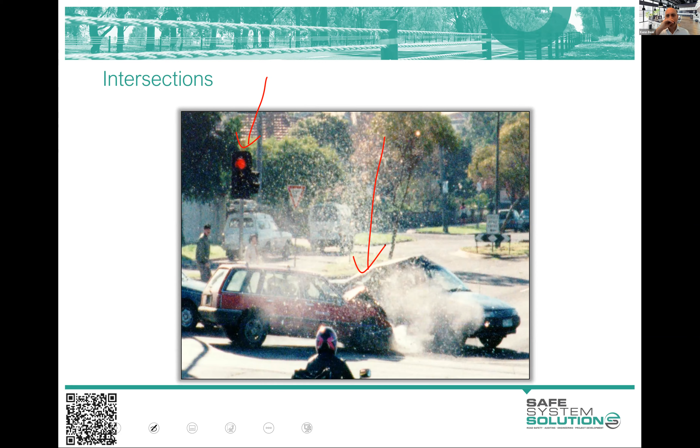Monash University Accident Research Centre came up with some very high-level principles for intersection design for safe system alignment. I'm not going to spend long on this, but I think they're worth going through. Don't forget to count your wombats.

Interestingly, the first few things they've got there are fewer vehicles, fewer intersections. That's interesting, isn't it? So they're starting out with a couple of principles which aren't really what you might have originally thought. Now, if you remember back at the end of last session, we talked about risk under a safe system assessment.

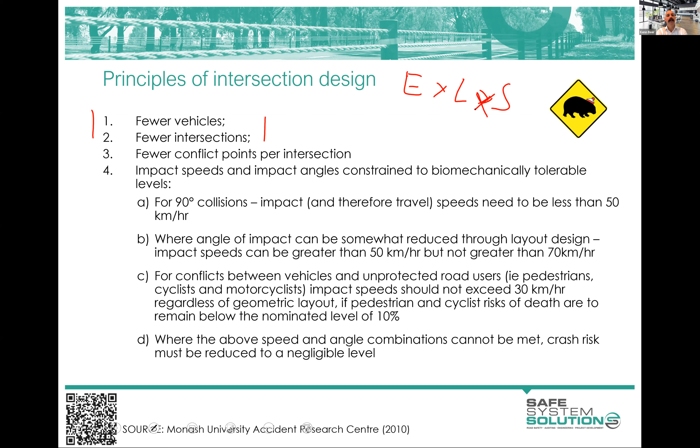Being exposure times likelihood times severity. Okay, that's a multiplication symbol. Exposure, likelihood, and severity. Fewer vehicles and fewer intersections are trying to address the exposure to crashes.

So that's interesting. Fewer conflict points per intersection. That's an interesting one. In a safe system assessment, we had that as a likelihood factor. If you eliminate the conflict points at the intersection, then it would be exposure. If you just reduce them, we call it a likelihood, because it's less likely that an individual going through there will crash.

And then we get into a whole lot of elements associated with the severity. You can see them talking about impact angles constrained to biomechanically tolerable levels. And that's what we talked about, the amount of force that us humans can take before we break. And for the 90-degree collisions, we're talking about that 50 kilometer per hour threshold.

And if you can get a bit more angle on that crash, it could go up from that. What we mean by that, I'll just draw over some of the text here.

So if you think back to your year 11 or year 12 physics, you did vectors maybe. What we're doing is when we're crashing at those sorts of angles, we're pushing the energy into the environment. We sort of bounce off a bit as well, right? You bounce off, and so the energy is not directed into that other vehicle.

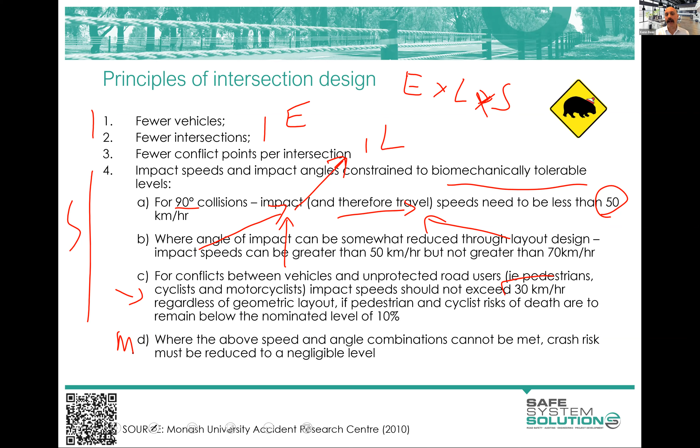So down the bottom of the whole thing is where these angles and speeds cannot be met, we need to reduce crash risk to negligible levels in one way or another. I'll get back to a bit on that. But anyway, that's sort of high level principle stuff.

You are doing this from a broad brush perspective based on this information that you've got there, based on that nice colorful chart that we gave you last module, and some judgment on how severe crashes could be. And if you're looking at a design of a new intersection, something like this, maybe you could draw some lines and get some precise angles, but you don't need to be that precise. You can certainly be a little more

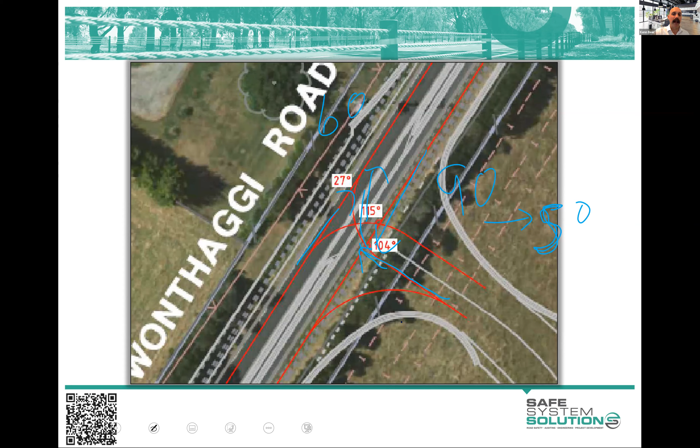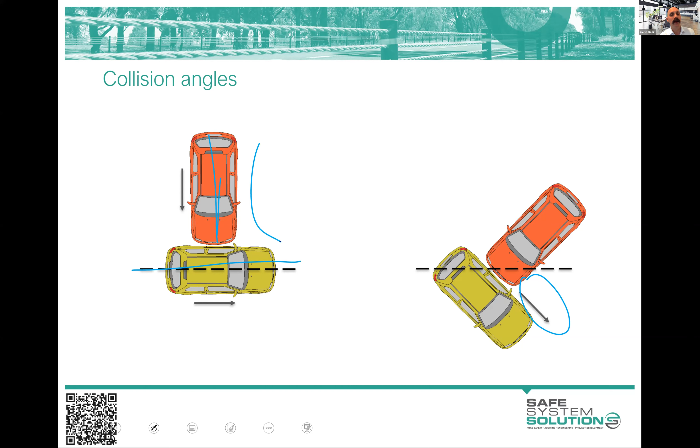Collision angle we've talked about, but also this interesting one of secondary crashes. So when vehicles strike each other, it's not often that it's that directly square. There's all sorts of stuff that goes on in these crashes. But the Centre for Automotive Safety Research did a big study of lots of intersection crashes that had secondary crashes occur that cause death and serious injury.

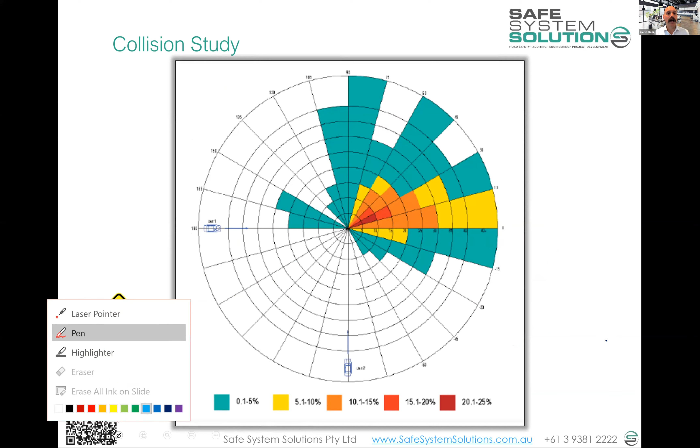So the initial incident occurred at the intersection, and so they've reorientated all of these onto the same axis. So you've got vehicle there, vehicle there. They come in, they have an initial strike, but then there's a secondary crash, which is the one that has, in their opinion, caused the death or serious injury. And you can see that it's obviously in that general area, the bulk of them, but there are some spin-off crashes.

There are some ones that go slightly into different areas there, so those are interesting ones. That might have been clipping the back of the vehicle and going off into that direction. Maybe I think there had to be an actual collision rather than just avoiding. But maybe, I don't know whether that research needed to be done. It's kind of obvious, but anyway, it's there.

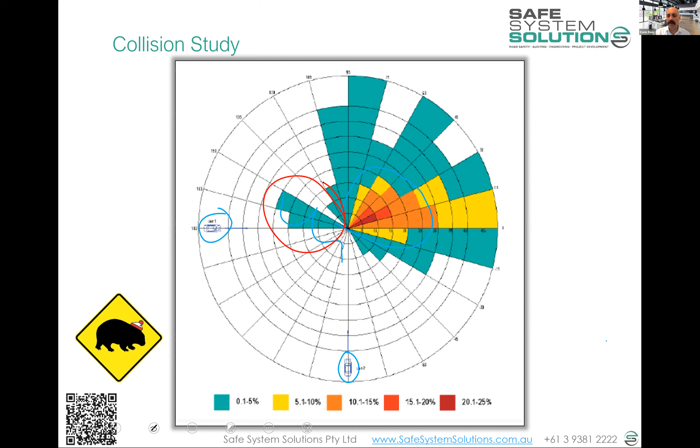But do remember these and keep these in mind.

50 kilometers per hour for a 90-degree crash for passenger vehicles, 60-ish kilometers an hour for more angled crashes, 70 for a head-on, and rear end. 80 is put there as not feasible, but it is feasible to run an intersection at 80 kilometers per hour if you have some sort of ability to get vehicles up to speed.

So if you've got a vehicle going and another vehicle that's managed to get up to speed, and those two crash, the delta V is what we're interested in - the change in velocity. That's what's being pushed into the occupants of the vehicle. So that first crash can happen at very high speeds as long as the vehicle's delta V, the difference or change in speed, is not above these levels. Obviously in that scenario you very much need to think about secondary crashes and where vehicles are going to go. But from that first perspective, it's pretty good.

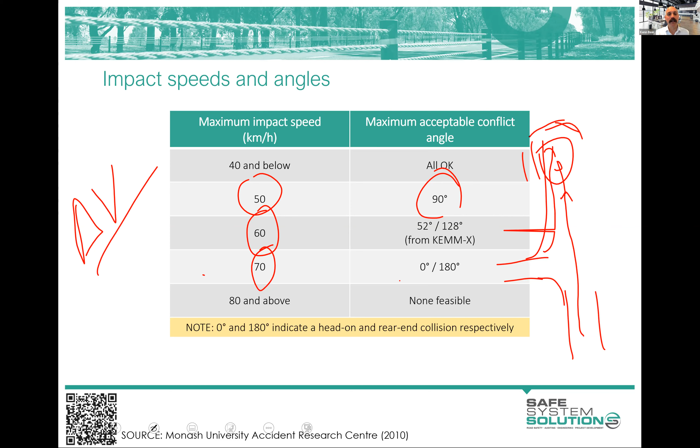All right, Max, anything I need to deal with before I jump into explaining an intersection exercise? All good, let's hop into the exercise.

Thanks, Ken. We are going to give people a few minutes on this one once I explain their task - a good few minutes, probably 5 or so at least. So let's jump into it.

Here we go. You've got an intersection. You probably don't know this intersection, but anyway, it's there. It's got a major arterial road on it here.

That's an arterial highway with a 70 kilometer per hour speed limit. It carries about 21,000 vehicles a day, 9% heavy vehicles. This is a bus stop over here, so it's a bus route.

This is like a drainage culvert underpass - it's not really an underpass, it's a drainage under-structure thing. Some of you will probably be angry at me for my lack of terminology around drainage structures, but it's a big culvert thing. This is a shared path.

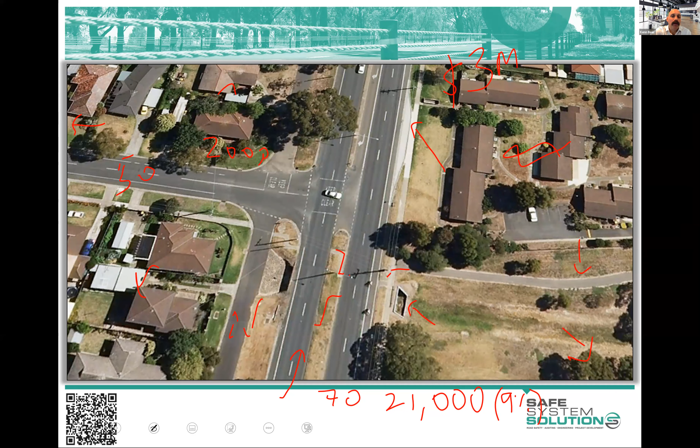So they've got to be coming from this way, be able to turn in. They've got to be able to turn out left and right, and they've got to be able to turn in from this direction. Service roads can be reconfigured and changed. There are some access points to the service roads in both directions as well, if you're particularly interested in that.

So yeah, can't close the intersection. I know you wanted to, because that was Monash University Accident Research Centre's first thing. Oh no, that was less vehicles was first thing. Second thing was less intersections.

The third constraint I'm going to put on you is you are operating in the current organizational and political environment in which you currently operate. So if you work for a state road controlling authority, you've got to imagine it in your organization, or if you're in local government, imagine you're in your local government and what the appetite is. If you're a consultant, maybe think about some of your clients you work for.

So if you're proposing something radical, something different to what is done, have a bit of a think about a strategy for moving that through the system, getting people's approval on that.

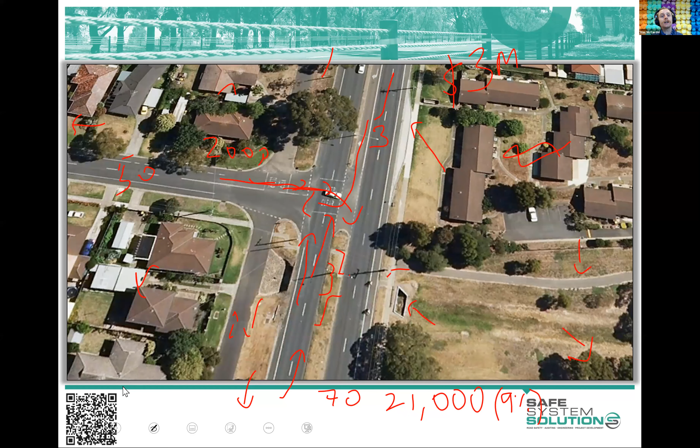The first cost estimation for our estimation tool for you, Ken. How much would it be to signalise this whole intersection? To signalise the intersection, $1.5 million. Okay, under budget. It's set up quite well to be signalised.

What about a roundabout here, Ken? How much would that cost? Yeah, a roundabout to meet the Austroads Guide to Road Design Part 4B, roundabouts. To meet that, because this is a B double route, to meet the size requirements there, it's going to cost $7.3 million.

Okay, so that's certainly out of budget. But what about a pedestrian overpass? Nice fly over the arterial there, Ken. Yeah, pedestrian overpass to meet DDA compliance requirements. It's going to have some ramps, then it's going to go over, and it's going to have this funky bit down here or something like that. We can do that. Well, it's 3.01, but I'm going to give you a good deal, and you can have it for $2.95 million.

Very good. Speed limit reduction. You could do a good deal for that, couldn't you, Ken? Yeah, we can do a good deal on a speed limit reduction. Some of you might be going, oh well, that'd be like a couple of thousand dollars. It's actually going to cost you $50,000. I know you're thinking you can just whack up the signs, but we need to do a bit of work behind the scenes. There's a process, community consultation, a period of that, then changing some of the electronic systems behind the scenes and inputting it into the GIS speed zoning system. And so we get some consultants involved to do some reviews. So $50,000 all up to change the speed limit.

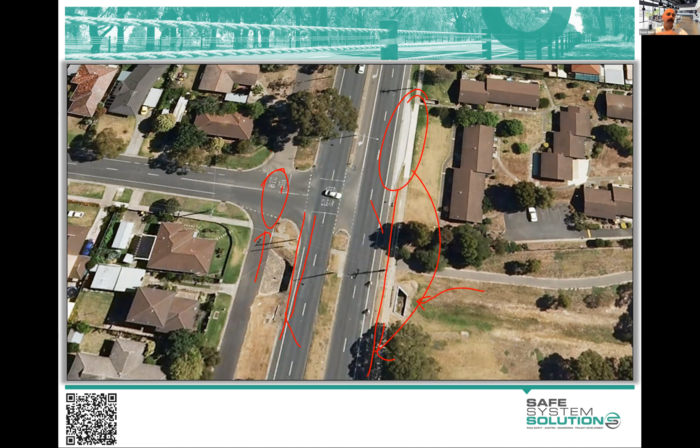A lot of you raised the signals idea. I'm going to put this little box in a lot of upcoming slides because I want you to get good clarity around what alterations in infrastructure change exposure, likelihood, or severity. A little window into how you do an assessment: you need to score exposure, likelihood, and severity for different crash types, and be able to justify each one—be very clear on what fits into what category. Signals are a likelihood-reducing piece of infrastructure.

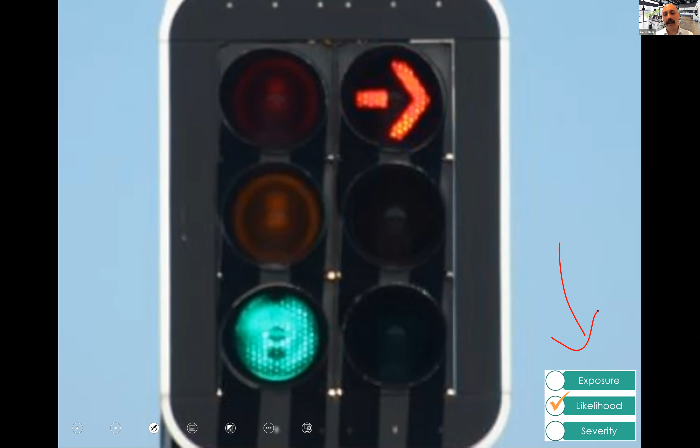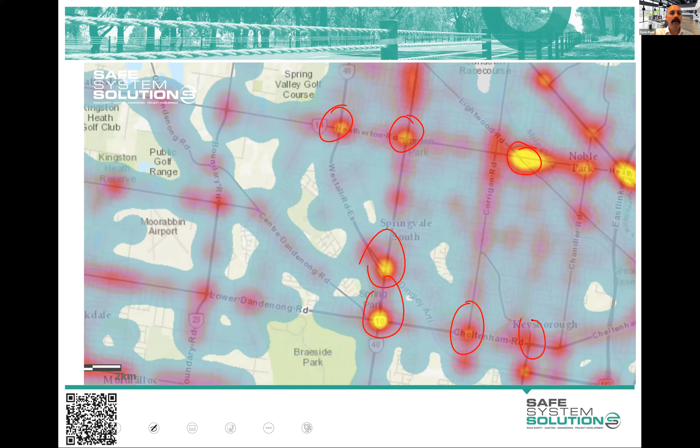But it's interesting to look at traffic signals—you can do this around pretty much any major city in Australia and New Zealand and find the same thing. What we've done here is grab a heat map: we GIS'd death and serious injury over a 10-year period and set the hotspot analysis going. The more intense the hotspot, the more death and serious injury. This is an outer suburban Melbourne area, around Springvale, but you could do it for Brisbane, Sydney, Newcastle, Auckland—the outer areas. What we're seeing are hotspots of death and serious injury, and each one I'm circling now is a large signalised intersection.

Doesn't that make you scratch your head a little bit? Really? Signals. If you plot your state or city's top 100 intersections for death and serious injury, the bulk of them are going to be large signalised intersections—the significant bulk of them. The reason we always find that is people get to the point of, we've signalised it, put in fully controlled right turns, red light cameras and speed cameras, and they just say, well, it's the road users, they've got to start following the rules. And the interesting thing is we just keep building these and thinking we're going to get a different result.

The interesting one is in a lot of these outer growth areas, what we're finding is that there was a roundabout there, and the volume of traffic increased and it became saturated, so they decide to duplicate the road or whatever they're doing—rip the roundabout out, put traffic signals in, because they can get a bit more capacity out of that.

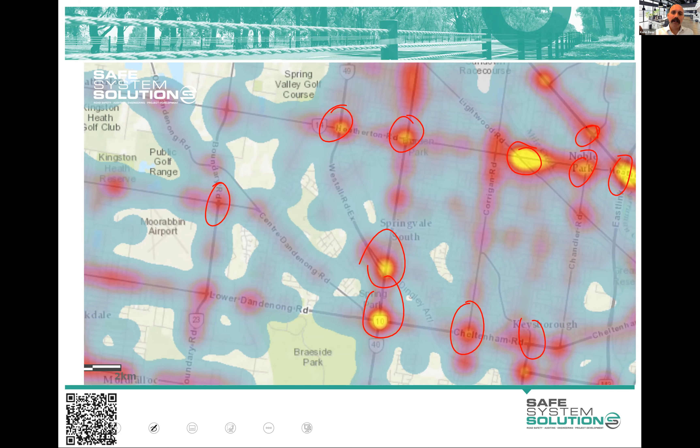Actually, Max, in a second I'm going to pick something out of my archives from my time at the Road Safety Department. But I'll explain roundabouts first—remind me if I forget. Yeah, no problem. It was nice to see a few people straight off the bat questioning, could we get a roundabout in?

Roundabouts, in a safe system assessment, we give them the severity reduction. And the reason for that is the lower speeds people go through them, and the better crash angles. So they're two immediate benefits.

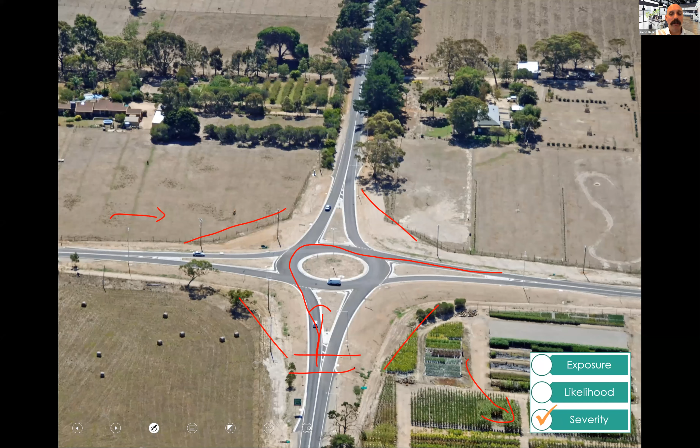Mind you, I do like the idea of metering roundabouts when you're in these situations, where maybe you could put a set of traffic signals here as a lovely pedestrian crossing, with a nice crossing path there. But these could also trigger when the queues of vehicles on this road gets down, and you could trigger that to a red, link that to that, and then some of them could distribute out, and then you could keep going again. So win-win, better crossing for pedestrians and cyclists, and some metering there as well.

Just going to say those art classes are coming along very well, Ken. That's a beautiful sketch you've got there. Thank you, well, I'm going to use some other colours.

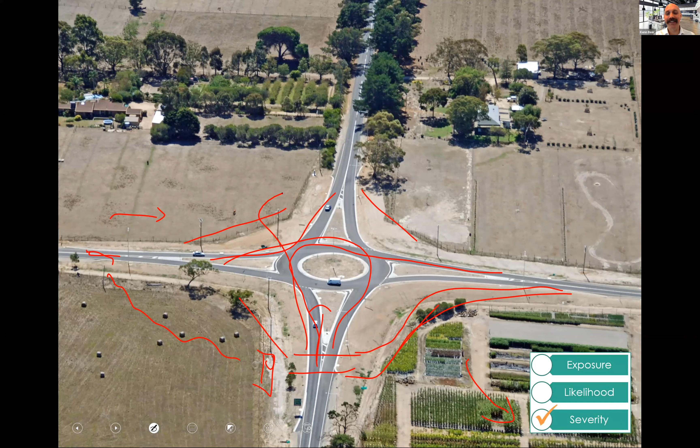But why are we getting such good safety benefits out of these? And we do get really great safety benefits, as well as some good traffic flow benefits also. The big reason on this is not the deflection, which we often talk about as one of the great reasons, conflict angles and the like.

The reason is that every vehicle approaching this, or more accurately, no vehicle approaching this believes they have ultimate priority. Each one is slowing down to look around because they may or may not be able to enter that intersection safely. And so what we immediately get is this enhanced awareness and looking around of vehicles and some slowing down. This is kind of the UK equivalent of the American four-way stop.

And I'm occasionally seeing four-way stops popping up in different parts of Australia and New Zealand, and really enjoying that. I think there's such merit to that, because we get most of our problems when a vehicle is travelling at speed and just continues travelling at speed. And if you can break up that at conflict points, we're in a big win.

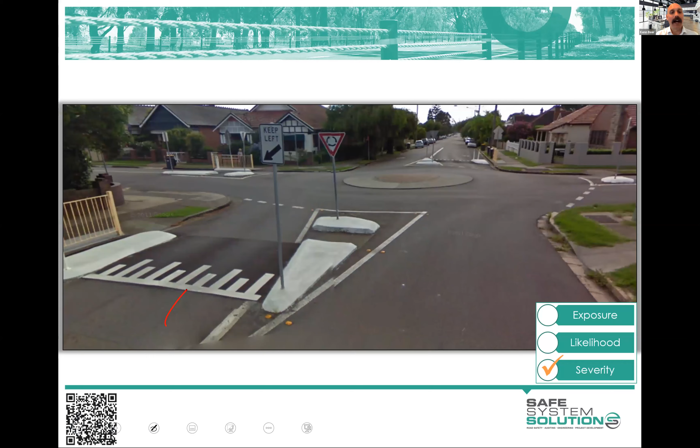Mini roundabouts, if you're worried about some of the approach speeds and things, of course, you can do raised bits to slow vehicles down on the approach to roundabouts, which is working quite well. And I've got lots of different guidance available on this stuff.

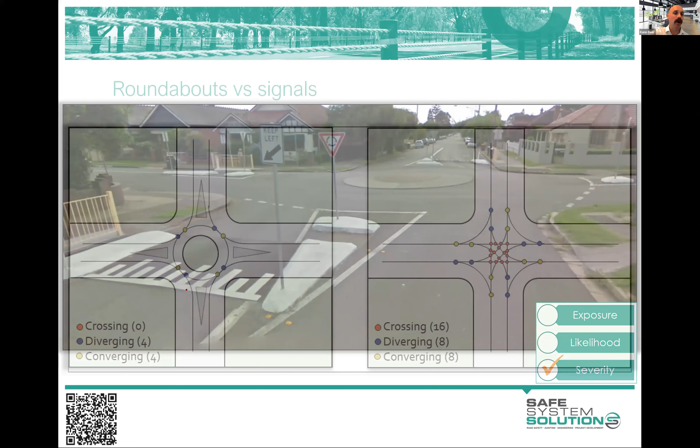But roundabouts have other advantages too. We do see less conflict points. The conflict point being simply the way you can crash compared to a signalised intersection or a give way/stop controlled intersection. They're just all the crash ways between passenger vehicles.

Okay, now pedestrians and cyclists becomes an interesting one. So what we see is the pedestrians and cyclists - pedestrians do not like roundabouts, and I'm sure you've faced the same. You don't like having to cross at these roundabouts. The severity of crashes is often lower, but we certainly see people avoiding crashes, and likelihood of crashes is up a bit. And it's certainly a major impediment to a lot of people walking as well, old people, young people, or parents letting young people walk.

So some issues around vulnerable road users. Max will talk a bit more about cyclists, and I'll talk a bit more about pedestrians and roundabouts in the next session.

But from a severity perspective, everything's still brought down. The challenge at signalised intersections is when crashes happen, it's often somebody running the red light. In fact, that's exactly what's happening. Or pedestrians walking out. It's like the speed is high, thus the severity is high. And we've got all of these extra conflict points as well.

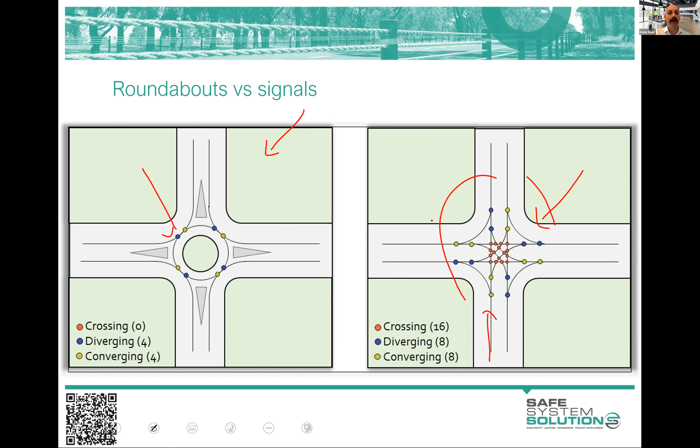The angle is better at a roundabout compared to some of the crashes that can happen at a signalised intersection.

As a vehicle approaches, I've talked about before, they don't have ultimate priority. Also, if there's a lump of infrastructure in the middle of the road that they've got to navigate around, they wake up. People are driving in all sorts of states of consciousness. And we don't like that, but that's the reality of it.

Sometimes they've worked a double shift. Sometimes they're a bit drug affected. Sometimes they're thinking about the fight they've had with their partner. And to have infrastructure pull them back to reality is just an amazing thing to be able to do.

And a roundabout does that. In fact, any sort of deflection on the road environment does that. So that's horizontal deflection around a roundabout, or vertical deflection over a hump or the approach to the hump. They will come back to reality, navigate their feature, and then go back into whatever world they're in.

We're always talking about alert and compliant road users, but unfortunately they're not in that camp all the time. So if we can get this at areas of high risk, we're in a great position. So that's my little slide to remind of that.

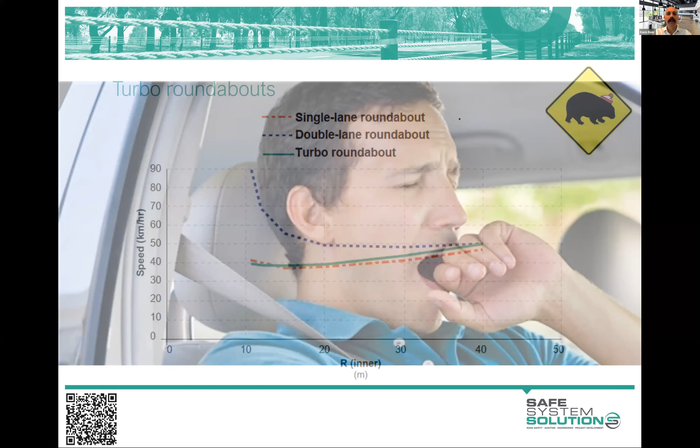Before I jump into some different roundabouts and discussion, let me stop sharing for a second, Max. I want to see if I can find something briefly. I'll give the history of it as I'm looking, if that's all right.

So it's in the road safety department at Vic Roads quite a while back. There was this massive congestion easing government investment. It was like the biggest congestion easing program anybody had ever seen. It was called, I think, Keep Melbourne Moving. Basically it was ripping roundabouts out and replacing them with traffic signals, because the modeling was showing you get better flow of traffic during peak periods.

So those were all coming into the road safety department. The designs were coming in for road safety review, road safety audit, and we were getting them and looking at them and going through them. What I think the regions were expecting from this was for us to comment on things like the line marking here should be different, or the phasing here is not right, or you need to use slip-base poles in these locations, or use joint use mast arms here, or these sorts of things.

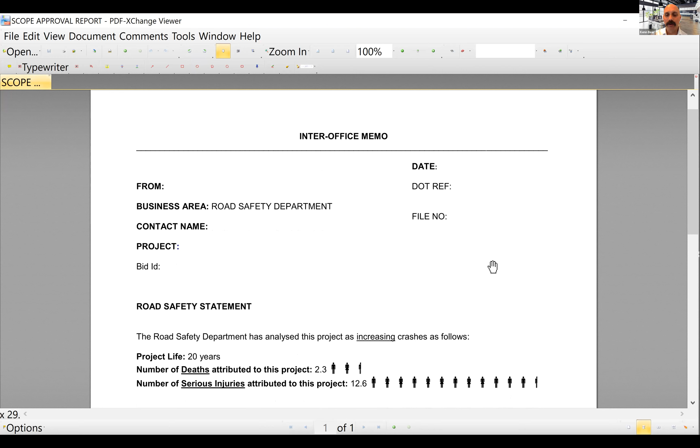But we started developing and sending out this one, and I have found it, so I will share it with you. Here it is. So I hope you can see that. I took a copy of this after I left. So this is the memo shell. So it was, you send it off.

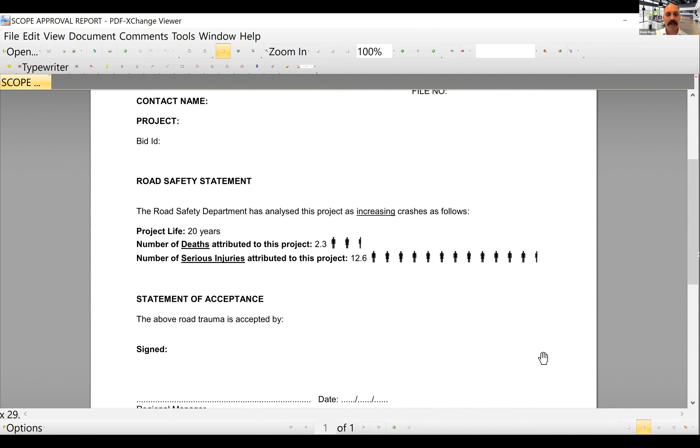Here we go. So the road safety department has analysed this project as increasing crashes as follows. Project life, 20 years. Number of deaths attributed to this project, 2.3. Number of serious injuries attributed to this project, 12.6. Statement of acceptance: the above road trauma is accepted by, and send it off to the regional manager or regional directors these days, for a signature. So that was the covering note on the return of the design.

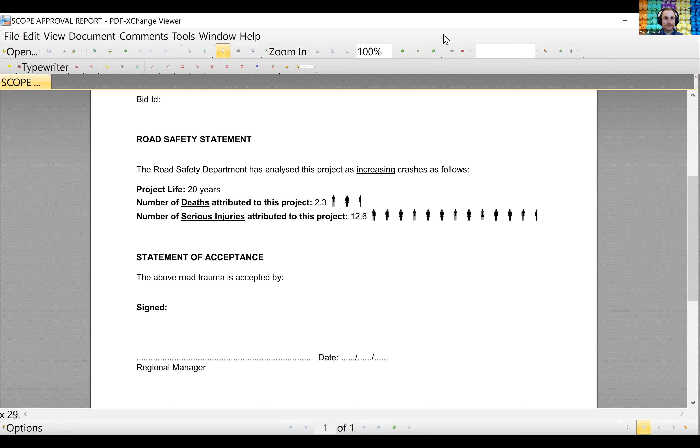Now, that was obviously well received by upper management there, Ken. It certainly was not. We never got one back signed. Myself and a colleague got hauled into the executive director's office, with a lot of commentary around not understanding the obligations of a road authority and the varied balances that need to be made, and the importance of easing congestion and the like. But the reality is that we were just saying this is going to make road safety worse, and somebody needs to stand up and sign off on that. Yes, intentionally causing a bit of a ruckus, but sometimes you need to do that to break up the usual.

Now, the reason I thought of bringing that up is because you don't need to do that these days. I mean, you can if you want, and I can show you how to calculate those numbers pretty easily. But you don't need to do that, because we have a safe system assessment which will quantify that and show the scores, not quite as in your face as sign off on killing and seriously injuring this many people.

Safe system assessments will address that, and I'll show you a little bit later on that it's quite heartening to see that it would be very challenging to rip out a roundabout and replace it with traffic signals without doing some other severity works these days. Although it does still happen occasionally - I do dust off the memo.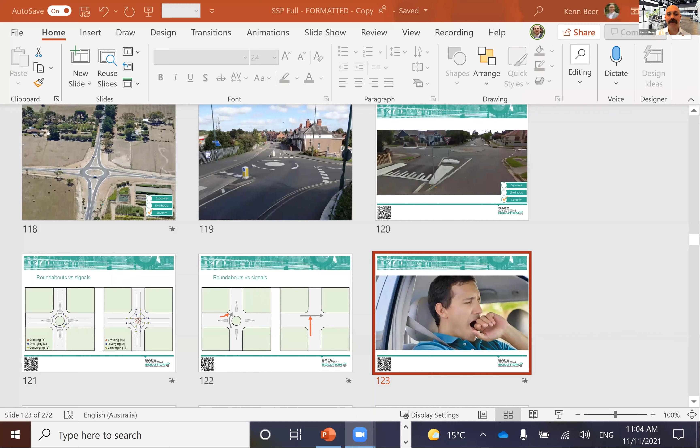Anyway, let me get back into where we were at. Oh, gone back to the same memo, have I? Nothing shared just yet, it's still blank. I disappeared for a second, did I? You did, it was very stressful. Don't get worried, Max, you've got all the content ready to go. I do. We're back, there we go. Good stuff. Okay, well I took a tangent there. Getting the old memo out. Okay.

We were talking about roundabouts. Roundabouts have some challenges around - you can't pump as many vehicles through there at some points in time, although I always question the traffic modelling when they do peak periods only. You're like, well, that doesn't really work, because what about all the other hours of the day where people are sitting at red lights for no reason? If it was a roundabout, they'd be able to go through. So can we do this across the whole day? Yeah, okay, the peak periods aren't going to perform as well, but the other periods are going to perform better. So anyway, it's another debate.

But we know not all roundabouts are the same, and we get better and worse outcomes at different roundabouts. Pretty much all of them are still performing better than most traffic signals in higher speed environments. You can see here an interesting chart of speed and inner radius of roundabout, and we see that smaller radius multi-lane roundabouts don't perform that well. Speed is often a good proxy for crash rates. Single lane roundabouts are better, and turbo roundabouts are performing pretty much the same as single lane roundabouts from that perspective.

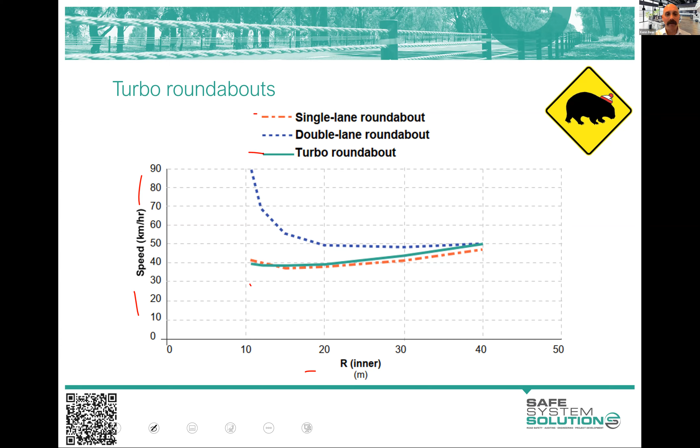Now, a turbo roundabout, just for your interest, is a dual lane roundabout, but you have a raised separator on the approach and throughout the circulating carriageway there. So if you want to go right, you've got to get yourself in that right lane, get into your sheltered right, and then around you go.

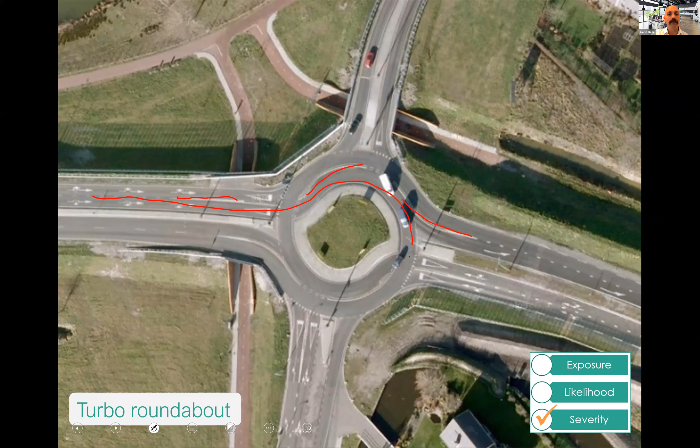Here's another turbo roundabout. I love this aerial image, because have a look at what's going on over here. We've got a truck that's obviously entered the roundabout with a vehicle coming, but look at the angle that's happening. It's beautiful. And we know it's going to be low speed, don't we? So you're seeing a mistake going on right there, but we know that it's not going to result in death or serious injury - just due to speeds and angles.

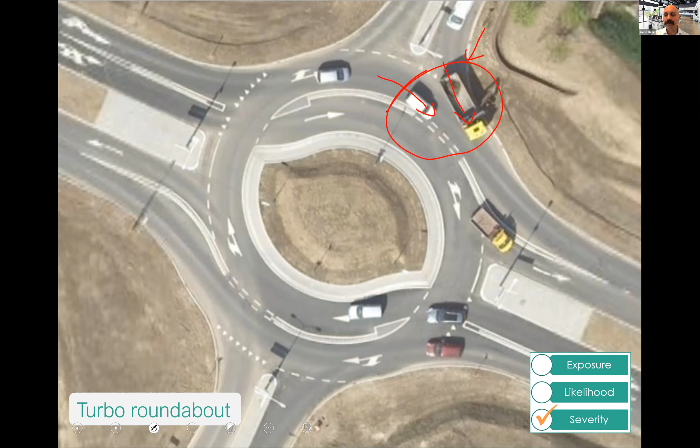And this is an interesting little roundabout. This is a massive roundabout, isn't it? It's a beast, and it's a turbo roundabout, and it's signalized as well - so it's got signals as well as the roundabout structure. It's out of the Netherlands, and I flipped it around because it would be very confusing if you were trying to think about it driving on the right.

But the reason I popped this one in is we had a Dutch engineer who we brought over - we were delving into cyclist roundabouts and the like. But I showed him this one. I said, this is just fascinating, I was amazed by it. Asked a bit about some things around traffic volume and the like. I said, in Australia, that would be a large signalised intersection until maybe at some point it got grade separated, right? But it would be a large signalised intersection at 70, 80 kilometres per hour. This was a few years ago.

And he goes, with raised platforms? I said, probably not. And he's like, but what about all the death and serious injury that would happen? And I'm like, yeah, I know. And he's like, he could not fathom that you would do that to your community. Which just sort of gave me that - we just think about this in a bizarre way, don't we? But they would, rather, acquire the land, spend the money, have this sort of operation than the idea of leaving that residual risk to their community.

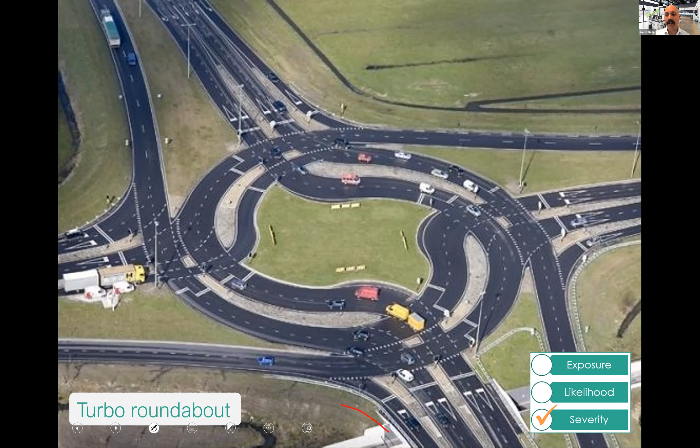It is interesting to see this philosophy playing out with our large signalised intersections. The question becomes, how do you disrupt the driver from that straight, fast run? And what ways can we do that while still acknowledging that on some of these heavy traffic routes, we're going to try to keep capacity up or improve it?

People are coming up with ideas like this one, the cut-through roundabout. The philosophy of it is really good, but people get freaked out by this. I think if they actually built it—and it is an artistic mock-up, it hasn't actually been built—if you were on the ground, it wouldn't be as scary as it looks from up here.

But the idea being that a vehicle coming in here is going to see the roundabout, it's going to slow down, improve their angle, and the road just winds all around.

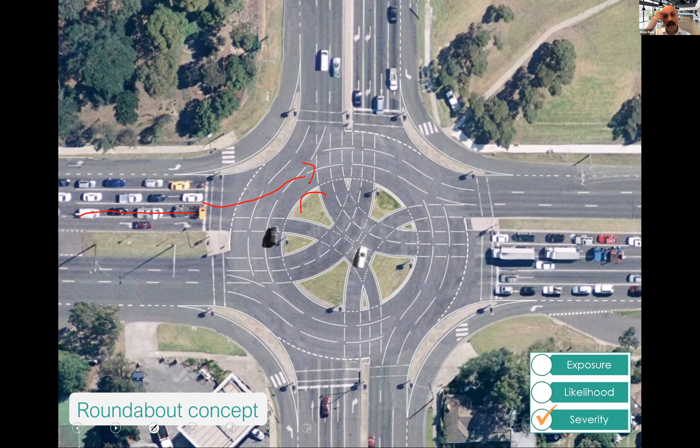As quite a few people were alluding to, can we utilize vertical deflection—raising the intersection, raising parts of it? Back when I started my career, if I'd suggested that on that road, with 21,000 vehicles a day, 9% heavy vehicles, a bus route, I would have been kicked out of the office. I'd have been told to come back tomorrow when I'd thought about what I just said—it would have been ludicrous. It's a highway, it's the arterial road, it's got freight, it's got emergency vehicles. We don't do vertical deflection on these roads.

But thankfully, we've evolved, and now it's very legitimate to look at whether we can provide some sort of raised feature on these high-speed roads. I'm not talking about your local urban speed hump—we can alter the grade to try to cater for different speeds and different vehicle types.

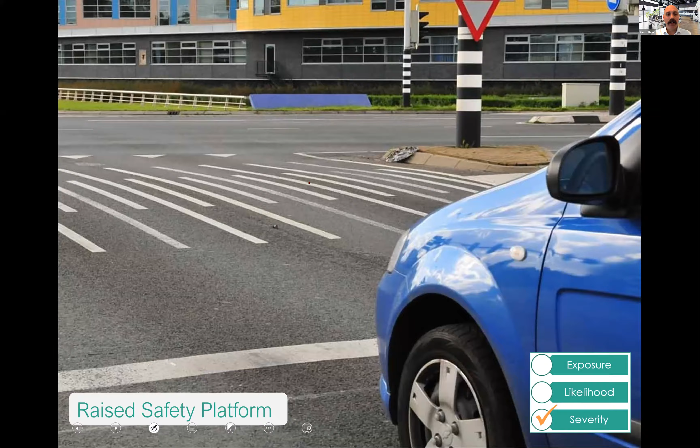So the region, in this case, looked at this and did some analysis—very similar to what you all did in 5 minutes, but it took a lot longer than that. They came up with the conclusion that signalisation is probably the appropriate treatment, given there's signals down the road both ways, and unbalanced flow, so signalisation is probably the go.

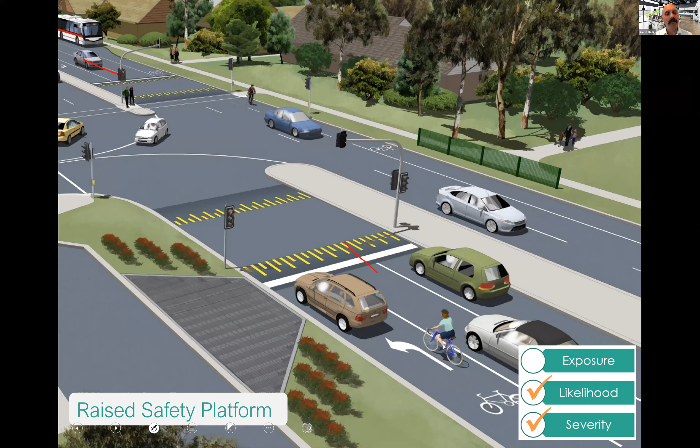To their credit, they asked: are we willing to just accept that there's going to be this residual death and serious injury, or can we do more? And they opted for raised platforms on the approach there—not raising the whole thing, to save some money, but also because it's not required, since what they were particularly interested in is reducing the speed of the bullet vehicle.

This is the one that's going to do the damage—the bullet vehicle. This one turning in, or this one coming out, they're not the bullet vehicle, they're the target vehicle. You don't need to disrupt their speed because it's a T intersection. You want to disrupt the speed of the target—sorry, the bullet vehicle.

Now, the cyclists and pedestrians, we'll put that to the side for the moment and come back to that at a later point. But the idea is a good one.

What sort of speed, when they're thinking about that bullet vehicle, that exiting vehicle, do you think the region was trying to get the speed of that bullet vehicle down to? Prue was in there pretty quickly with 50 kilometers per hour there, Ken.

Yes, well done, Prue. So I was specifically talking about the vehicle-to-vehicle exit, and it's about a right angle there. Remember, 50 or below is what they were aiming at. Now, if you're really focused on the pedestrians, it would be 30 or below, and that would be nice. But this is where they get themselves to a balance, saying going from 70 to 30 on this, with all of that stuff, is a challenge—and there are low pedestrian numbers.

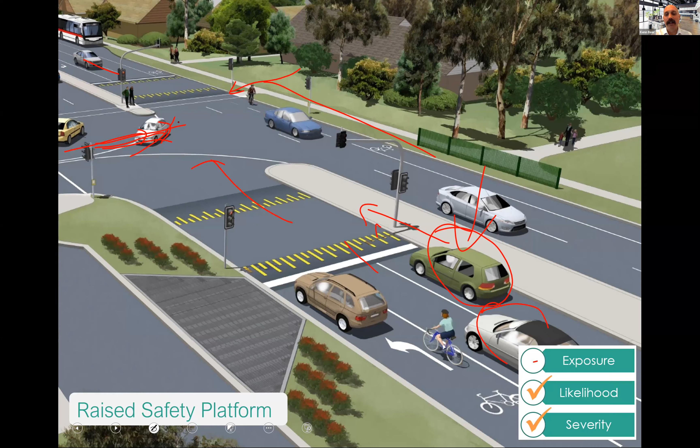We're reducing the likelihood of pedestrian crashes with a whole lot of good features. So, in the balance of things, that's how this one played out. But remember that 50 for passenger vehicle right angle crashes, and there you go, it was built.

Okay, this is not just pie in the sky ideas anymore. This is a while back now, almost 5 years back. You can see there advisory 50s. Now, eventually, the speed limit actually got reduced, but that was never the first intention. The first intention was to do it with advisory speeds.

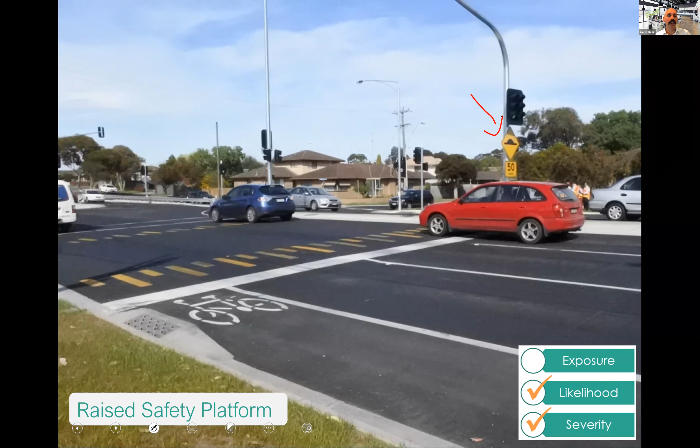And people are far more accepting of advisory speed limit reductions than regulatory speed limit reductions. When you give them the option to slow down because of infrastructure, they don't get too angry. You put a roundabout in, for example, people don't jump up and down about the speed issue. They jump up and down about some different things occasionally. But the idea is that they have to slow down to navigate this, but it's their choice to do it. They're not going to get a speeding ticket if they don't slow down, but they will, and they never complain about that. So this is a similar idea.

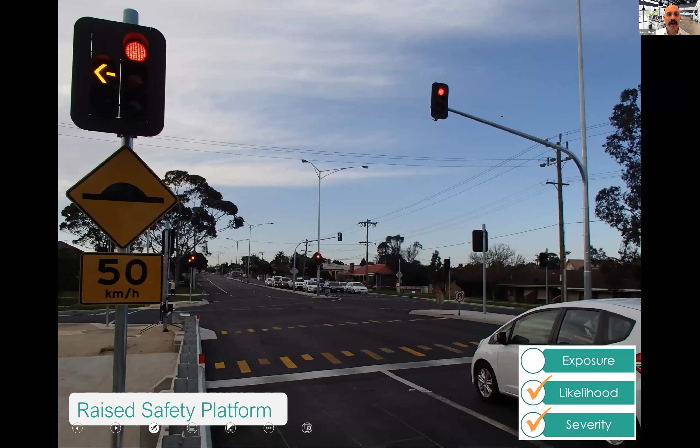And there you go, you can see a bit more of it. And there's a photo I took while I was out there having a look at some different aspects of it. And I love this photo. I love the fact that we've got a vehicle slowing on the approach to a green light.

It's so exciting. Now, some people get really angry about this. This is so inefficient. Like, if it was a roundabout, everybody would be slowing down. We'd be seeing lots of brake lights, and nobody would bat an eyelid about this. It's just that we're so used to signals and just getting this free, fast run through it that people are annoyed.

But you can see here that we're now ticking the boxes of both of them. We're reducing the likelihood of crashes because we've got signals, and signals are going to help pedestrians cross as well, but it's clearly doing that. But when bad things happen, they're going to be slower.

And this is another interesting one. There's data coming out of different raised intersections, raised platforms and the like to show that the dilemma zone also tightens. So the dilemma zone, for those that aren't familiar with that term, is that point in time and space as a vehicle approaches an intersection where the driver is in a dilemma as to whether to put the foot down and go or brake. I'm sure you've been in the dilemma zone before. That's actually its term. Some terms in road safety or road infrastructure, I just go, whoever named this is brilliant. Like dilemma zone and trap lane are two of the big ones for me. Just such good naming. Dilemma zone.

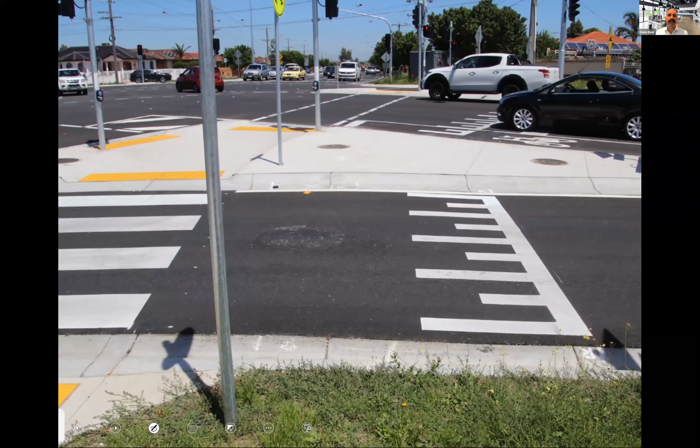And what is also really exciting to see now is that there is a lot more of these going in when areas are being altered. Like this one, for example, which used to be a roundabout, and guess what? It got ripped out because of congestion or congestion easing and replaced with a set of traffic signals. But hey, at least in this case, and with safe system assessments pushing, there was the decision to use raised safety platforms to lower vehicle speeds through there to around 50 kilometers an hour.

Now, I'd probably like to see at least the slip lane be 30. That would be nice. But we might want to see lower for some other reasons. But we're on a really good journey here of not accepting these high speeds through these conflict points in these areas.

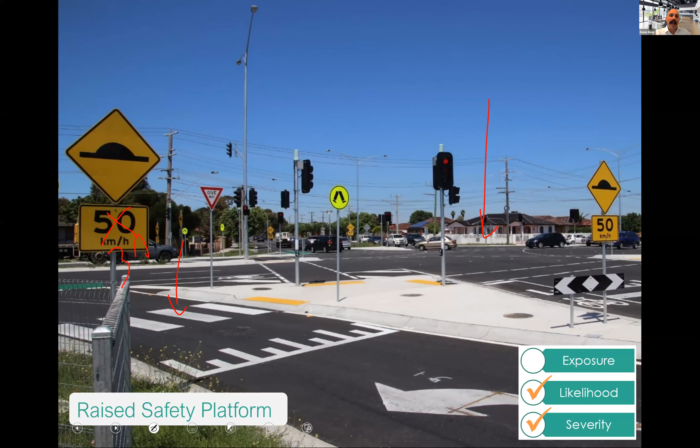So that's exciting. And there's lots of different documents available now. We've got raised safety platform guidelines from the Victorian government. There's a wonderful Austroads project report. I thought I had a slide with the Austroads one that was recently released, which analyzes 12 or something raised intersections on major roads. There's a recent evaluation that's been done on these arterial roads. There's a lot of excitement and interest.

So if you're in a jurisdiction that doesn't do this currently, get ready, because I reckon it's coming and you can be involved in that. If you are in jurisdictions that are doing it, you're getting an understanding of why. And when you assess from a safe system perspective, you can see that this is a viable option for recommendation on some of these higher speed intersections. And you can see some of the advantages you can get.

Just a quick one for you - I was trying to filter through the records, but do you know how much this one cost to actually build, to install?

Well, I don't know exactly. I picked the 3 million mark because I think it was somewhere around that with the extra features and the like. But there was a lot of consultation, design reports, design reviews, design committees, building of the

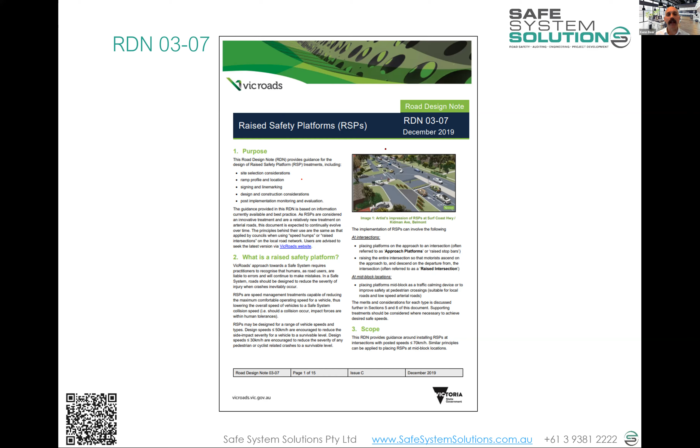Just a quick one on similar thinking, and again, we're not necessarily talking about these specific treatments or scenarios. It's more the philosophy of how people are very consciously trying to address severity of crashes now, not just the likelihood, and I'm loving to see that.

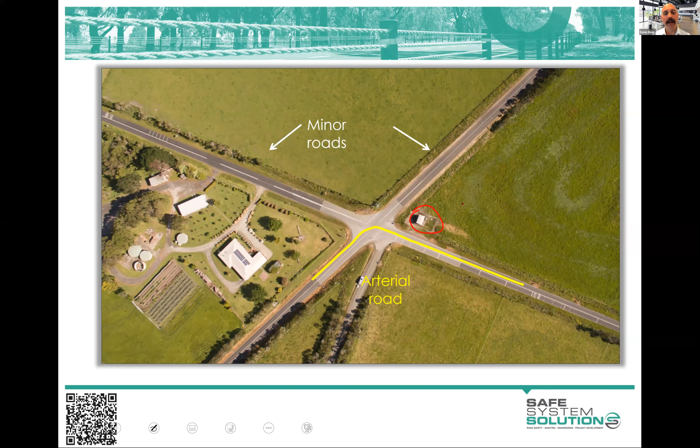So here's another example of an intersection, high-speed environment, arterial road that snakes around that way. Because of this telecommunication exchange and the property boundaries, they had a lot of concerns about crashes. They wanted to put a roundabout in, but that's a huge cost moving this, so it went back to, well, we'll just do right turn lanes and upgrade the lighting a bit and do bits and pieces. But still such high speed, high energy crash potential at this location.

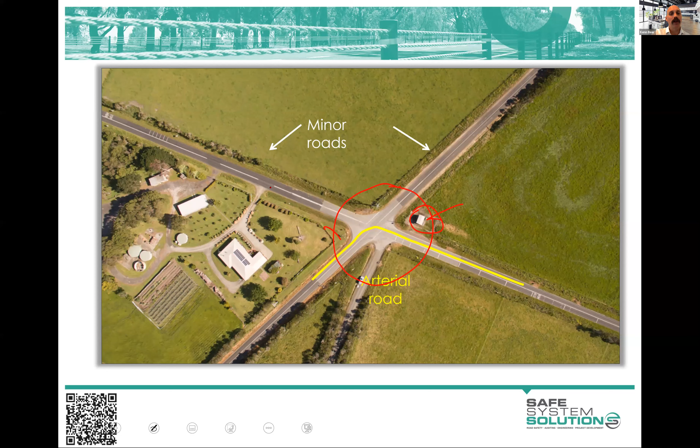So this was one where somebody mentioned that compact roundabout - the idea of a smaller roundabout, can that work? You lose the deflection. A larger roundabout will have, in a lot of jurisdictions, reverse curves on the approach to try to slow vehicles with a chicane essentially, and with the larger roundabout there's a big deflection around that, so you get really good slowing of vehicles that way.

So to try to address vehicle speed on the approach, it was looked at again, some raising of the road using raised platforms and raising the intersection, and going with a very small roundabout in the middle and a larger concrete apron, so a larger vehicle can track over that and make their move.

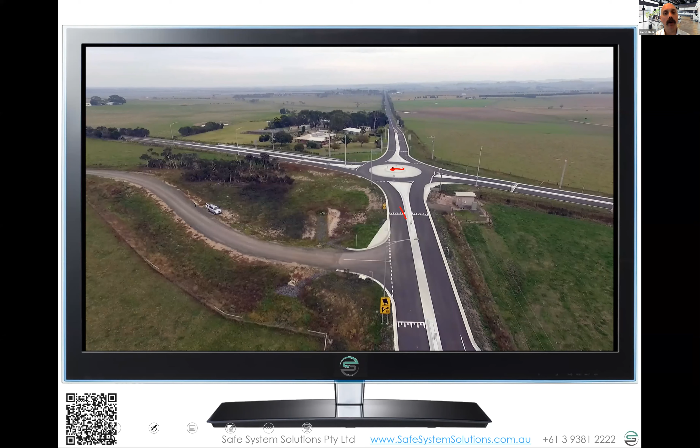So lovely one, and again, safe system assessments involved in that whole process, where those first ideas of, oh, we'll add a right turn lane, we'll do this - the safe system assessment just reminds us that's going to improve road safety a little bit, but it's not going to get us that big drop in safety the way this does. Big drop in death and serious injury, big improvement in safety the way this does. So it's qualitative, in your face - that's why these sorts of things are better.

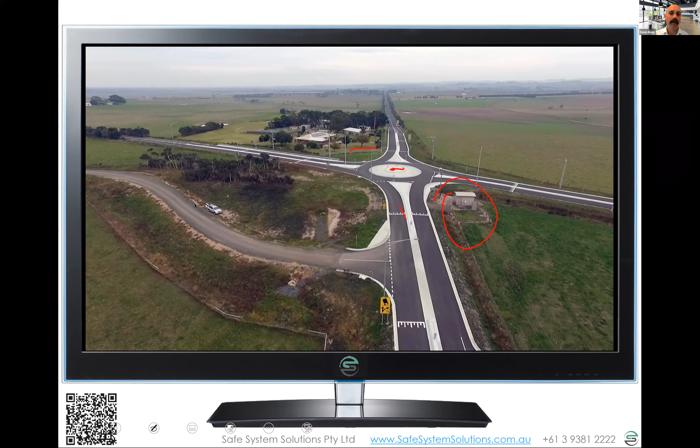Now, I do have a little quiz here. Max, hopefully that one's ready to go. Yes, let's launch this guy.

Little poll, remember you're not being marked on this. Hopefully everyone can see that on their screen. True or false: traffic signals are not safe system. Is it true? Is it false? Is it unintelligible, meaning that's not a very clever thing to be asking, Ken? Yeah, that's nonsensical.

Now, Max, there is an assignment for people to do at the end of this session, isn't there? That's right, so I'll be running through that at the end of this session, so you know exactly where to find it and what to do. And it's not a long assignment, isn't it? So they don't need to cancel their weekend plans. No, we certainly hope it's not taking more than 10, 15 minutes. That's kind of what we'd allow for it.

I've got everyone participated, so I'll end the poll there and I'll share the results to see the variation in responses. Over to you, Ken.

Yes, well done to everybody there. I was angling an unintelligible question for two reasons. The first is that you'll notice the question uses the binary - this is safe system, this is not - which is not a good way to talk about things. The second is you've got no context. In a very low speed environment, traffic signals could be very well aligned with safe system principles. In a very high speed environment, it may be very poorly aligned with safe system principles.

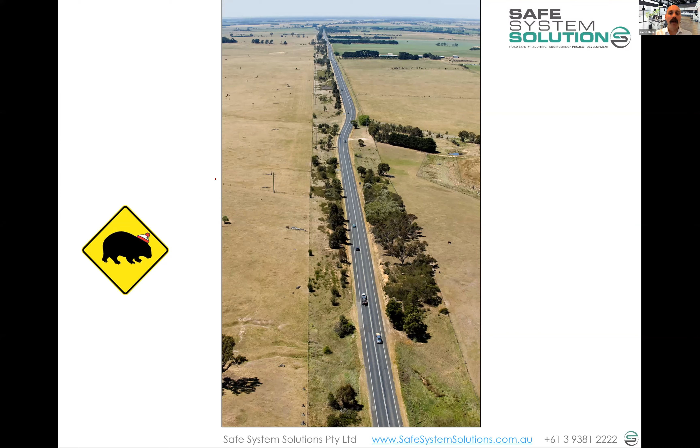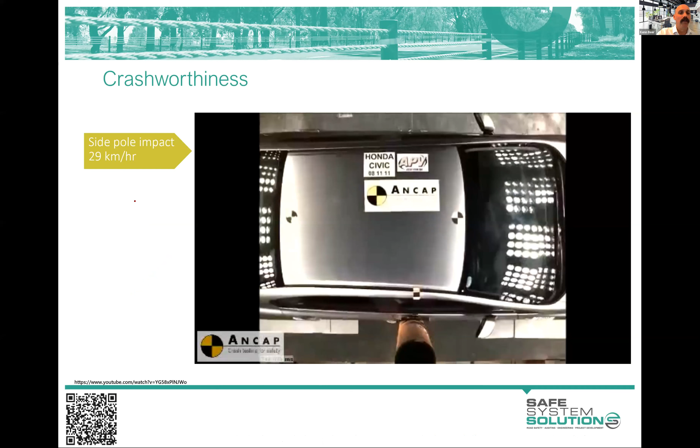And we know that those point source hazards, those poles - I talked about the 29 km/h test, it's now gone to 32 - the pole crash. We are so far away from being able to withstand that energy of those side crashes where a vehicle yaws, that's sliding, and hits a pole like that.

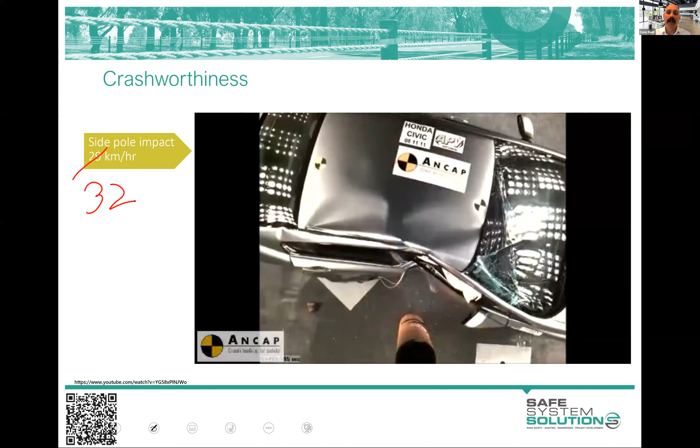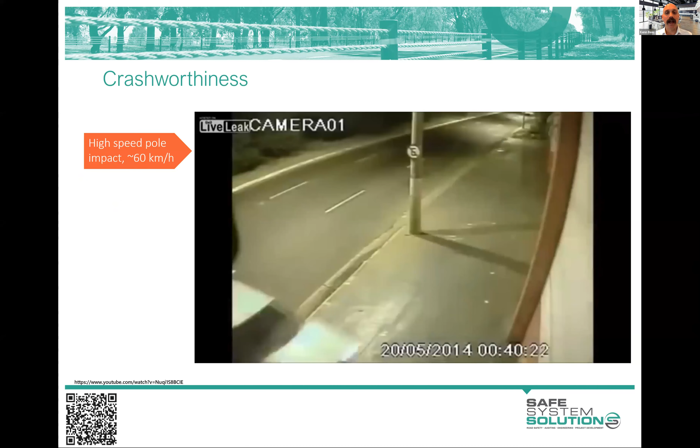And here's one which is quite disturbing, this one. But to see - and it was estimated at 60 kilometers per hour - this is more the violence of these crashes. The energy dissipation in that is just staggering.

So the thought then would be, let's remove all of those point source hazards off the roadside - the trees, the power poles, potentially even the culvert head walls and those sorts of things. Can we just clear this back? And surely that will give us the best alignment with safe system principles.

Well, there's been a lot of research and studies into this - the idea of a clear zone, which I'm sure is a term that many of you have heard of. Let's clear an area free of hazards, fixed hazards.

Prize, max, for the person who tells me what VKT stands for first. I'll give out a few more prizes. Vehicle kilometer traveled - by Tegan. Well done, well done Tegan.

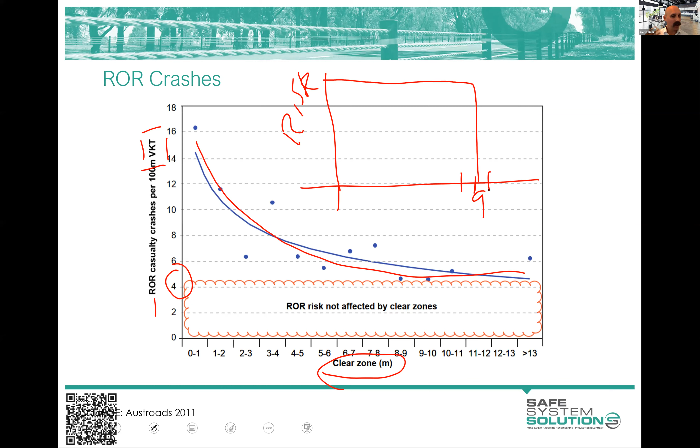Second of all is, well back then there wasn't a better alternative, because putting a barrier up was - yes, it was a lower risk - but if you could clear those fixed hazards, that was a better safety outcome. But barrier technology has just gone off the charts.

It is amazing now. And actually we've discovered, lots of research around this, that a barrier system at about 4 to 6 meters is safer than a cleared area. That's interesting, isn't it? And the reason for that is that if you keep providing that clear space, rollover crashes come into play, and the ability to go beyond that.

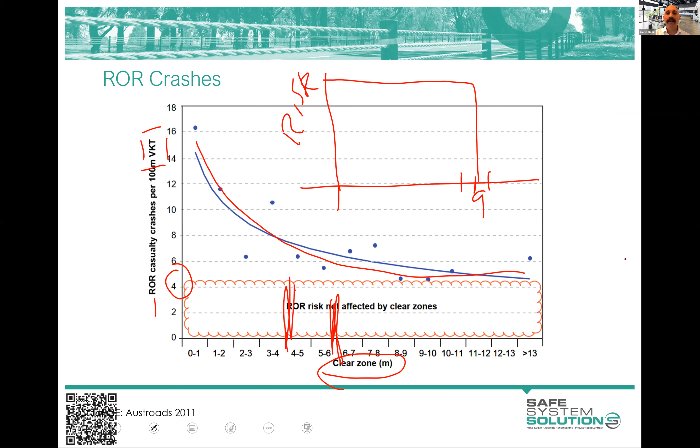So wide cleared areas are not necessarily a safe place to be - hazards beyond rollover. Mind you, you do get a pretty good outcome for having clear free of hazards for the first 4 to 5 meters, but it's not necessarily the highest alignment we can achieve for safe system principles.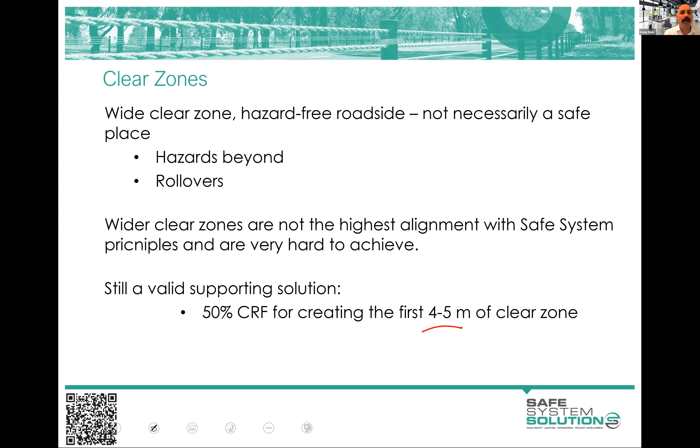Continuous flexible barriers is the highest alignment. So we're not going to be looking at building roads like this into the future, which thankfully now the new Austroads guide, which has just very recently been released, doesn't have this in mind.

Because this road environment was all trying to only address the likelihood. Sealed shoulders, audio tactile edge line, center line, cleared areas - it's all likelihood. When the crashes end up happening, the severity is just as bad.

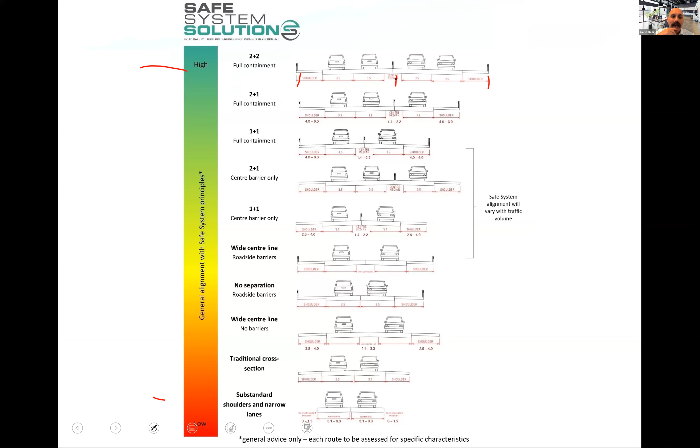So there's the new Part 6, which alters the way of thinking. I'm not going to go into that. But we've done these very cartoony style illustrations, just high alignment with safe system principles to low alignment. You can see there, we've got continuous barrier systems, flexible barrier systems, the bumper bowling of roads, some people like to call it. It sort of alters and you can move things around depending, but I'm not going to spend any more time on that.

This is an interesting one to see though. Here, if you've got this wide sort of median cleared and some cleared roadside - if any of you know AusRAP or iRAP, the star rating of roads for safety, the same way you star rate fridges and energy use, we star rate roads. We certainly do a fair bit of that. There's an official protocol on how you do it and what goes into it, but you can give it a star rating. That's a 4-star road, but this is a 5-star road with that central barrier and outer barriers.

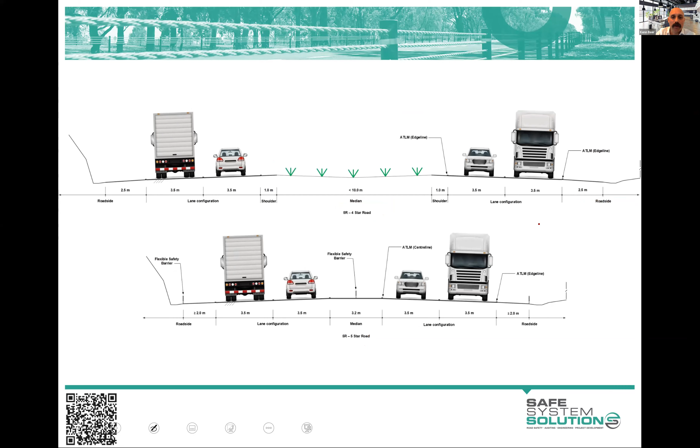So it's a safer thing. It actually takes up less cross-section as well, interestingly, so it could be cheaper to get better safe system alignment. I won't go through all those cross sections - they're in your notes if you want to have a look at some star ratings of different cross sections and the like, and there's a couple of Austroads guides.

But we do need to be very aware of the details of how we roll out these systems. I just popped this one in because it's interesting - if you look at the risk from just a normal perspective of vehicles breaking down and being struck, it's very, very low. Like it's not a risk. Far, far greater risk if we were to leave roadside exposed.

But the community perception of risk is fascinating, and you cannot underestimate that in your ability to roll out public infrastructure. This one just, people went absolutely berserk - a very long, continuous barrier system at an offset, an awkward offset like that. So just have a think about pullover bays and getting good offset.

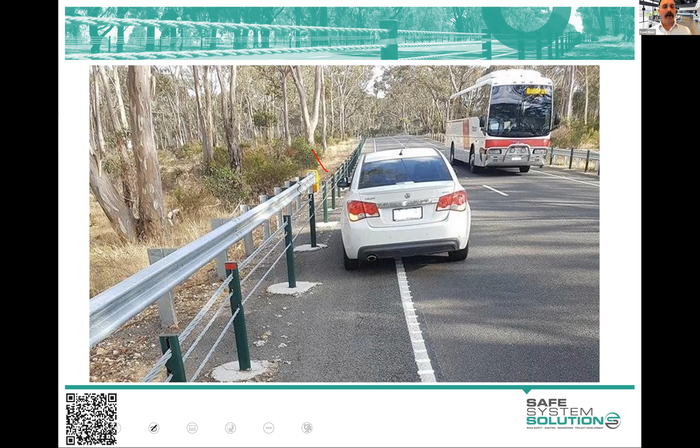There's lots of different information available about barrier design and continuous barrier systems, but we certainly don't have time in this course to go through that. We've got a 3-day course on barrier design if you're interested in going into a lot of those details, and some of you already know a lot of that detail as well.

The last thing I want to point out about thinking about energy management, energy absorption, is this one - the Raptor cushion. I'm not, like, it is just a product - there are many products out there, and I don't have any allegiance to this one. I just like the idea of it. So that's a Raptor cushion for those who've never seen it.

And what it is, it's like this device - it's sort of got a honeycomb center, so it absorbs some energy, but that's not its best energy absorbing characteristic. It's not fixed to the ground or anything like that, or to the pole, because when a vehicle strikes it, it rotates, right? And its angles are, in the way it's set up, it rotates. So what it does is it deflects the energy of the vehicle and moves it along.

So it's kind of like martial arts - deflect the energy of the punch. I've never done martial arts in my life, I watched The Karate Kid. So the idea is it rotates, and I just think it's a brilliant way to think about energy management on a fixed hazard like a power pole like this. Now we have challenges with utility providers - they get angry about putting this around their assets.

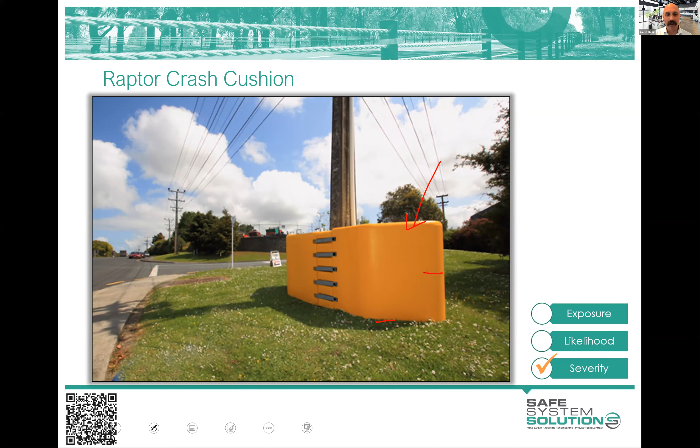This crash, where there was a Raptor cushion around a utility pole, in this very old Ford with 4 male passengers at 2am - the scenario, they've made a mistake, right? And you might get angry, but the thing is that somebody decided a Raptor cushion should go around utility poles.

This did happen at a roundabout, and I've just sung the praises of roundabouts in a huge way. I think though, when they were coming in, other vehicles would have been - if it was 2am, probably wasn't anybody else there - but they would have been slow looking around, so we've got some advantages there anyway. They've come around, they've left the road at something around 90 kilometers per hour, and they've hit that. They all survived minor injuries. They're all leading a normal, healthy life because - and the big forensic report on it was the Raptor cushion was it. That saved them. I just thought that was quite interesting.

Energy management technique - mistake, inappropriate, we don't want it to happen. We've got to try and address that, keep working on stopping people doing that. The vehicle shouldn't have been able to go that fast, all of that sort of stuff. But the end result, because of the energy absorption, was they survived.

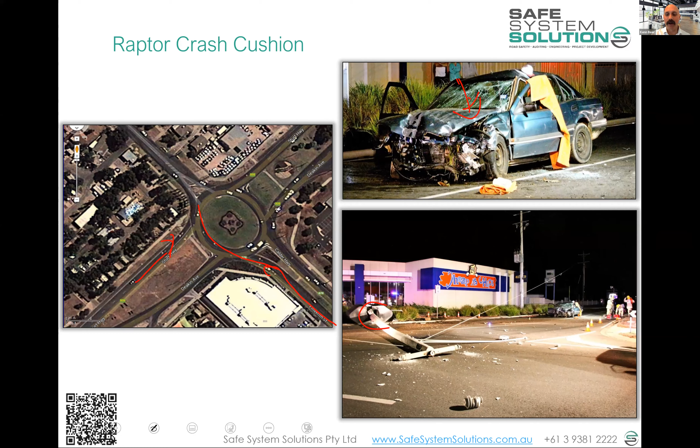All right, Max, enough of my ranting. Over to you. No problem, you can take people through the assignment.

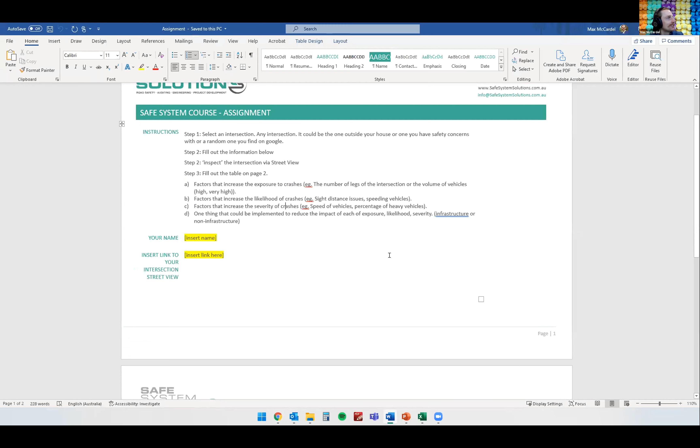We'll hop straight into the quiz and the assignment for today. So there is a quiz, just like the module 1 quiz - you just click on that and click attempt quiz. For the assignment, however, slightly different approach: you'll have to download this Word document. You can click on that and it will start downloading. I've already opened it up because sometimes it crashes on me, which just looks embarrassing. So here's one I prepared earlier. The instructions are written at the top here.

What you're going to have to do is select an intersection - it can be any intersection that you want, it can be the one at your local street, it could be at your kid's school or perhaps near work, any intersection that you want. Then we're asking you to fill out a table that's on the page overleaf. You also have to inspect the intersection - you don't have to go out there on site, just via Google Street View, or if you're familiar with it, if it's at the end of your street, maybe have a walk down.

But what we're after is we want to identify particular factors that relate to exposure, likelihood, and severity. So I'll hop onto the next page, but all you'll need to do on this page is just insert your name and also a link to the intersection that you are investigating.

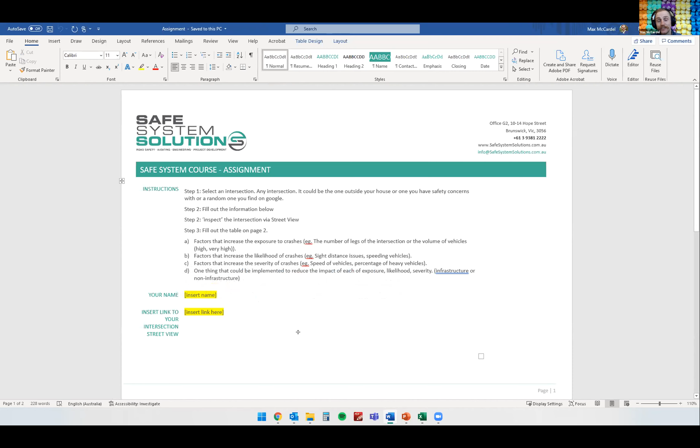So here's the table we're after you to fill in. We're after a minimum of one factor and a maximum of 3 for each of these. This is why Ken has been identifying all of the treatments and reiterating if they've got to do with exposure, likelihood, or severity - because this is your first assignment and you'll be doing that yourself. So we'll look at things that can influence, either increase or decrease, the risk of exposure. You can jot down some notes in there.

Some factors that increase or influence likelihood, you can jot down some notes there, and increase or influence severity, jot down some notes there.

We also have this other row, asking for anything that could change within that environment that would reduce the impact of your exposure, likelihood, and severity. In other words, you're thinking about what could actually be done within that environment to change the exposure, the number of units, vehicles, pedestrians, cyclists, etc., that would either reduce the likelihood of a particular crash type occurring or reduce the severity of the risk.

So there's only one that we need for this row here, and one to three for the ones above.

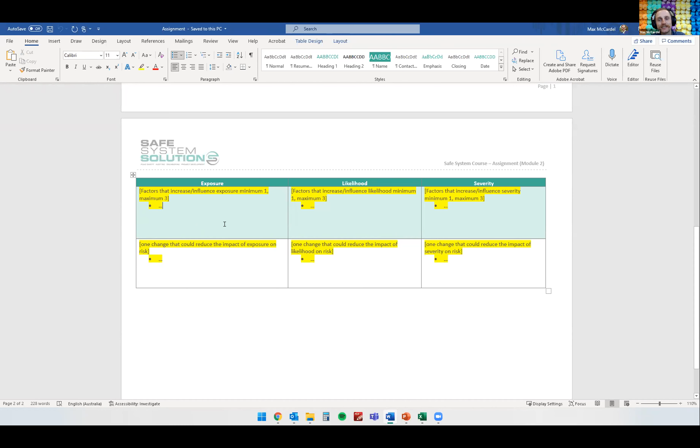What we'll get you to do is, if you save a local copy of that on your computer, you can then hop back into Moodle and click on Add Submission. The reason we get everyone to do this through Moodle is it makes sure we get a notification that you've submitted it and it's ready for grading. We then review it, provide you some commentary on how things align with what we would expect, and pass on any feedback through Moodle as well. So it's all done within this system.

If you have any questions about the assignment, you can email myself or Ken, and we'll be happy to respond to those queries. But all the actual submission of the assignment is lodged on Moodle. Hopefully that makes sense.

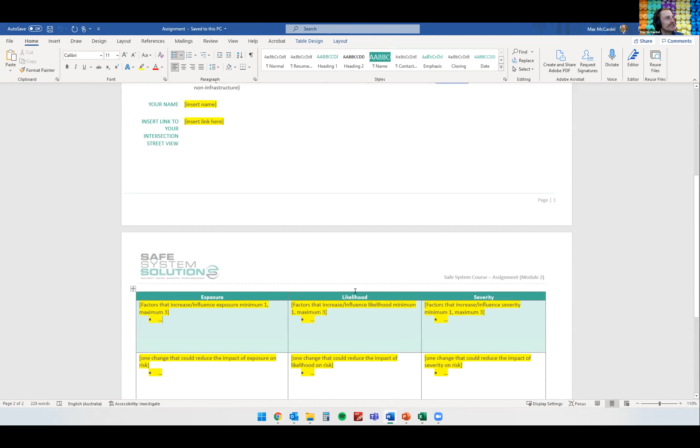I'll just touch on the assignment again. We're not necessarily looking for the most detailed review of this particular intersection, and if you're worried you're not capturing all the risks associated with it, you won't be graded on that. You're just graded on whether you're correctly putting things in the right column - whether it's got to do with exposure, likelihood, or severity. So it's not the whole big picture, it's not a full SSA we're getting you to do. We just want to make sure you've understood those three different factors and which elements of the road infrastructure relate to them.

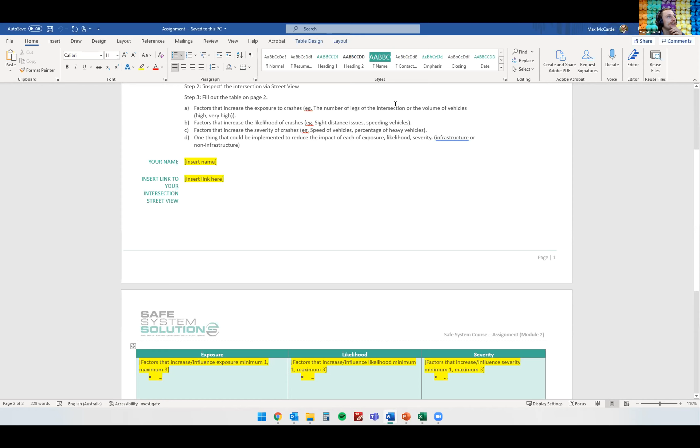Ken: Beautifully done there, Max, exactly what I was going to say. You don't need to go into an intense, find-every-risk exercise. We just want to ensure that you're getting the categorization right.

At the start of next session, we'll see if anybody wants to volunteer for us to jump into their site via Street View, and they can talk us through the issues and the exposure, likelihood, and severity. So there's a bit of interaction there. Next session's all about vulnerable road users - pedestrians, cyclists, motorcyclists, and that sort of thinking.

A couple of questions had popped up, which I think are going to be covered nicely in the next session. Anything else, Max, or are we going to give people sort of five minutes to do their quiz and jump in and start their assignment?

Yep, I just thought the due date for that particular assignment is Monday, but if you can get in earlier that's always good for us, so we can grade it and have a look at the assignments before our next module. Another question that came through was how long do we get access to Moodle after the course, which I don't actually know the answer to. Do you know that one, Ken?

Yeah, I think it's about three months or something. But the thing is, we suggest you just download any of the resources you want, maybe put them onto that memory stick that should have arrived, and then you've got all the ones that were originally loaded up already on that memory stick, and you can add any new bits and pieces as you go.